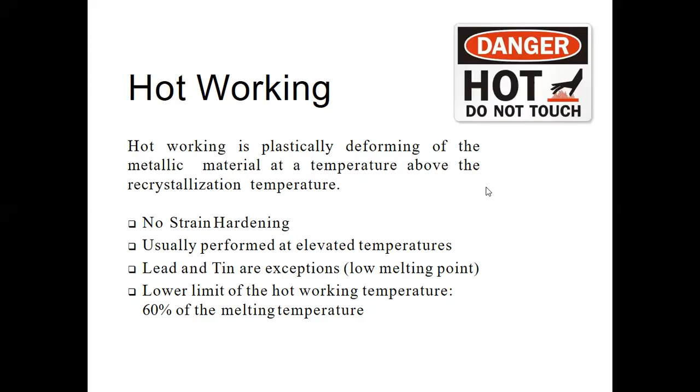So now what is recrystallization temperature? As I said, the crystals are forming again, recrystallization, right? The temperature at which atomic mobility can repair the damage caused by the working process is an alternative definition. So if, for example, you have increased the temperature of the material, now there is atomic mobility, right? Atoms are moving; they have received some energy in the form of heat energy. That is what is repairing the damage caused by the working process, right?

Because this is actually talking about when you have done some cold working process, and now you want to repair the damage. How do you do that? You take it to a temperature and maintain it at that temperature, right? Usually the temperature that is maintained is the recrystallization temperature. That is why we say the temperature at which atomic mobility can repair the damage caused by the working process is your recrystallization temperature.

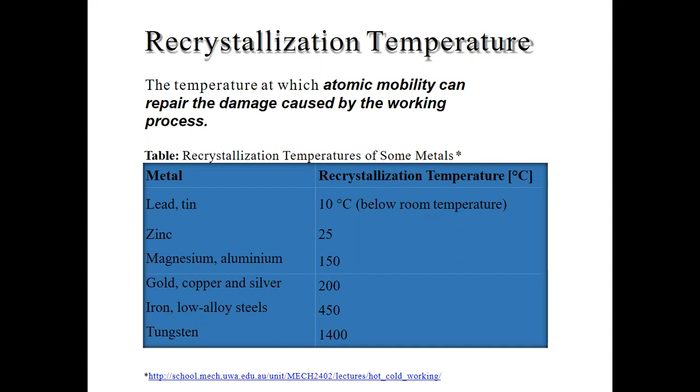Now the mechanism for hot working: there is no strengthening occurring during hot working, right? It's not receiving much strength. Unlike cold working, where it will receive some strength, right? But here in hot working, there is no strengthening occurring. It is not becoming hardened. So no strengthening occurs. Elimination of imperfections.

How? Gas pores can be closed. Composition differences can be reduced. With hot working, the gas pores can be closed, and that counts as an imperfection, right? It can be eliminated. Composition differences also, because if there are different compositions that have not mixed properly, then this hot working process will be responsible for mixing those different compositions.

Anisotropic behavior is gained. Surface has a finer grain size than the center. So the behavior of the metal is different at different regions. So he's saying at the surface it has a finer grain structure, and at the center you have coarse grain structure, right? So because of the difference of melting, difference of solidifying, you will have this anisotropic behavior, right? Which is desirable in some cases and not so desirable, right?

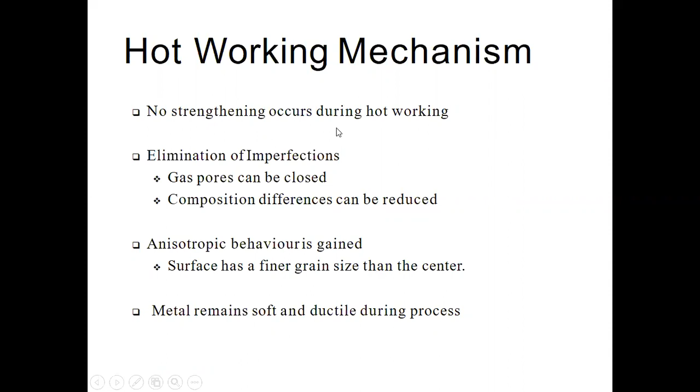So the application areas of hot working, right? The processes which involve hot working, we can say in one sense. Hot rolling, extrusion, forging, hot drawing, all these require the temperature, right? It requires certain temperature, and that temperature is what we are keeping as a reference to decide if it is hot working or cold working.

So these all processes involve hot working, right? We have extrusion in our syllabus, forging as well. So upon taking the component to a particular temperature, you can basically, sorry, either forge it or extrude it. So that is why they are linked, hot working and these processes. What I was talking about, extrusion, forging, hot drawing, etc.

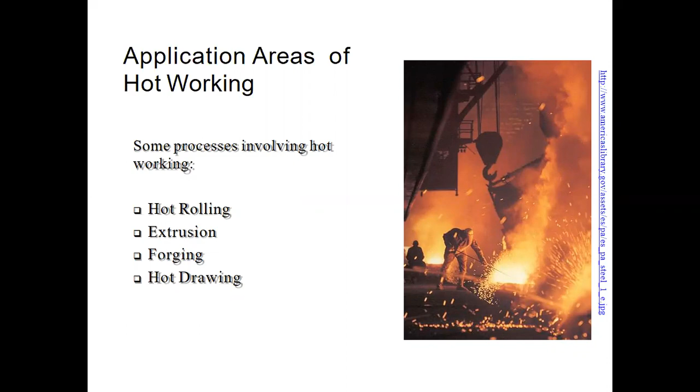Hot rolling, just to give you an idea what is rolling and how it looks like. You have, as I said, change of this grain structure. You can see how it is here and how it is here. Because of the deformation, the grains have deformed, right? Recrystallized grain structure, you see, recrystallized grain structure. So as it cools down, you may even have more difference of the grain structure.

So that's hot rolling. So you see, this is a cross section, right? If you look at the components which are hot rolled, you will see that aluminum is hot rolled in this particular example into a coil of desired thickness. So those are coming out, and this one is a coil of hot rolled steel, right?

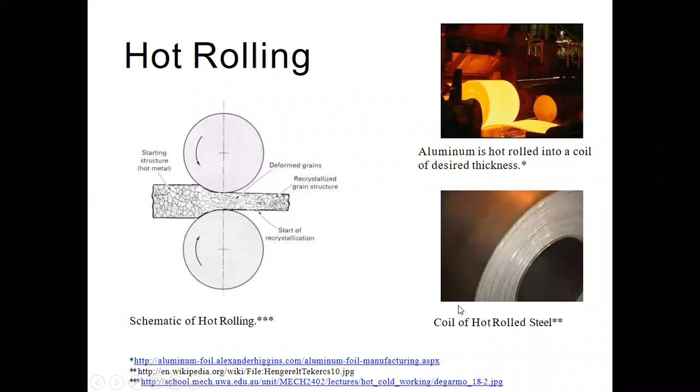So we'll just go through the basic understanding of these processes so that we can follow. The other topics which I said, they are helpful to identify what type of process to go for, etc.

Extrusion is a process used to create objects of a fixed cross-sectional profile, right? As you can see, hot extrusion is a hot working process above recrystallization temperature, right? So if you are saying it is hot extrusion, then it has to take into account the hot working guidelines, right? And because it is above recrystallization temperature, that's what is being highlighted. We are trying to extrude it, right?

This is the ram. This is your billet or starting material, which is being pushed through this ram. And the other thing would be you take a blank and then you try to force it in that die profile, and this blank will be converted into the final product, right?

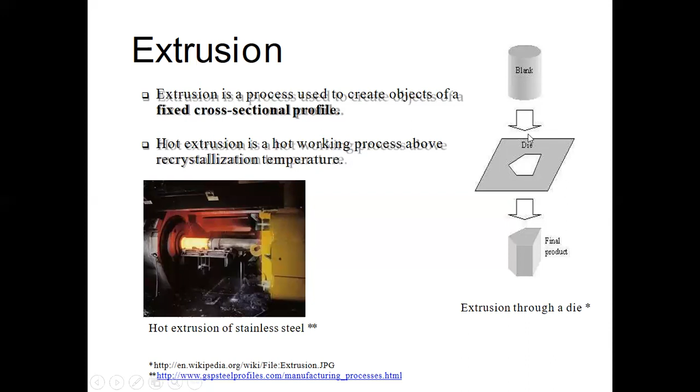As for forging, simply stated, it's a manufacturing process involved in shaping of the metal using localized compressive forces, very high pressures. So only when you are trying to have more localized compressive force, then the process to go for is forging, right? Because at the periphery, if you want more strength, then your periphery should be good, right? It should have that capability to take up those localized compressive forces, right?

Many process types under forging. You have drop forging, press forging, roll forging, right? All these are there.

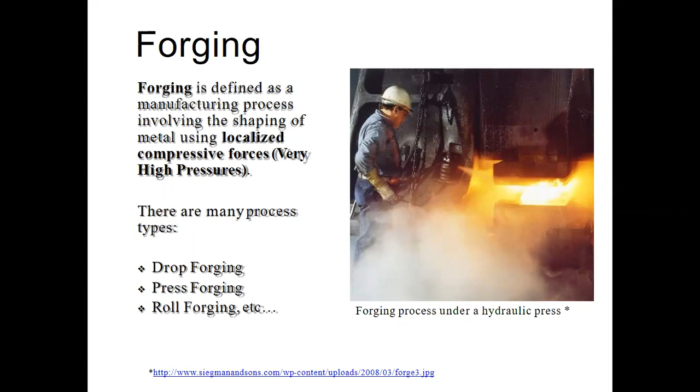As for hot drawing, I said it's a material working process which uses tensile forces to stretch material, isn't it? You're trying to stretch it from here, and therefore you're saying that it uses tensile forces, right? And it's used to stretch material. Hot drawing is above recrystallization temperature.

Okay, so yes, because this is under hot working or basically hot drawing, under hot drawing you will have recrystallization taking place while it is subjected to that particular temperature. Various types of process: bar drawing, tube drawing, wire drawing, right? So this is the basic drawing process for a metal bar, right? So it is taking the shape of the die cavity, right? The drawn bar.